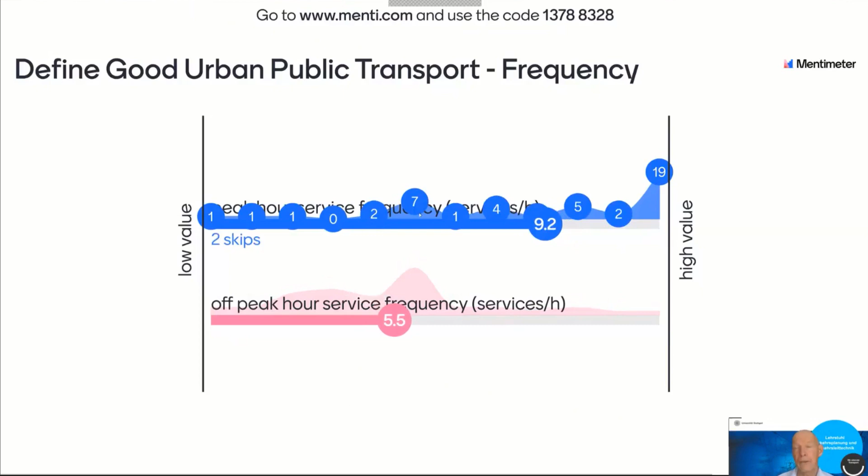We see that many of you think that every 5 minutes is what we should try to achieve. And then the second largest value is every 10 minutes - this is 6 times per hour. And for off-peak hours, the majority of you believe that we should also have 10 minutes in off-peak hours. Some go down to fewer services per hour. So this is frequency, and I guess we all believe that frequency is important.

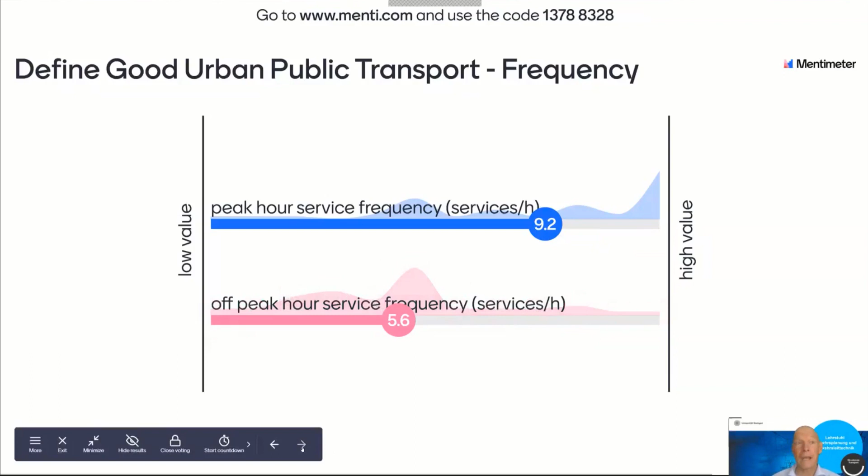Now, accessibility - how long do you want to walk to a bus stop and to a metro stop? And I'm talking about maximum distance. Of course, on average, it will be shorter, but if you allocate stops, where would you allocate them to say that is an acceptable distance in an urban area? So that means, something like 99% of your population should reach a bus stop or a metro station within that distance.

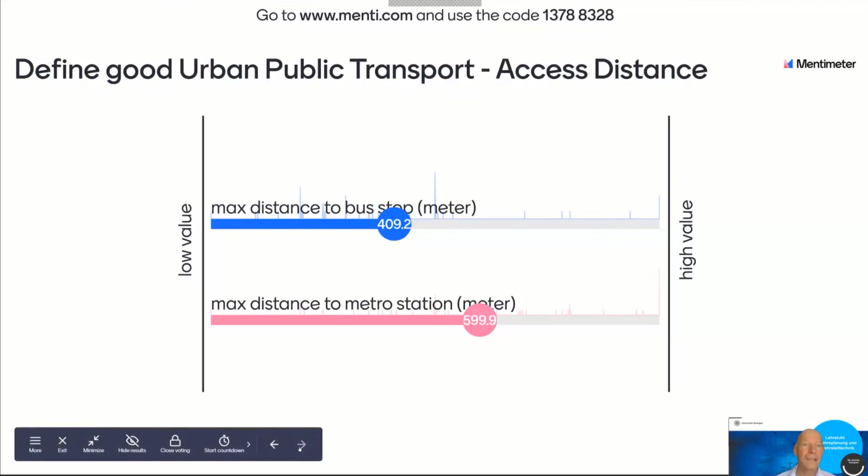Tomorrow we will look at some of those values again, what certain guidelines may say. And the last one, it's the most difficult one.

So what is your expectation for peak hour if you travel from suburbs to central business district? What is your expectation if it's off-peak hours, in the evening, at nighttime? And what is your expectation for tangential trips? So from maybe not suburbs to suburbs, but from somewhere in your city on the outskirts to some other place, so you're not going to the central business district.

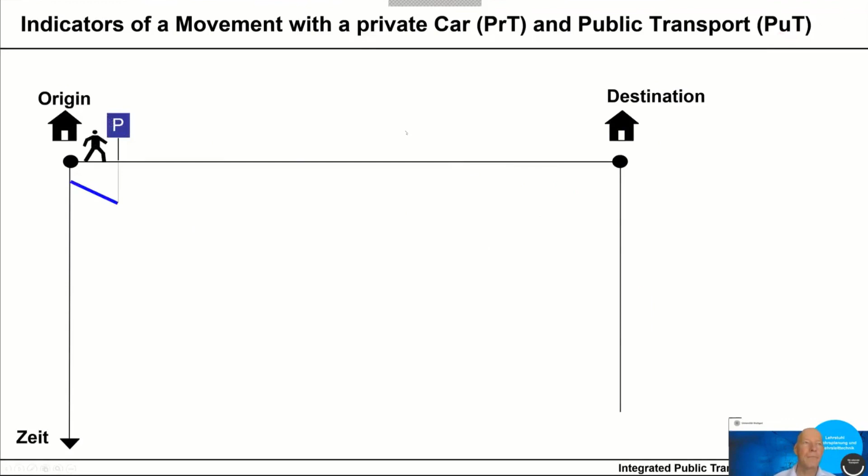If you travel by car, you park your car somewhere, maybe close to your house, so you walk to the parking lot. In the inner city, you have a feeder road, then maybe a main road. If you travel longer distance, after some time you will reach the motorway. You travel at higher speeds until you reach your destination, or at least your destination town. You decelerate, and maybe you search some time for parking, and you have an egress time to the destination. So the components of our time are access time, in-vehicle time, maybe certain delay times at intersections, parking search time, and egress time.

If you do it likewise for public transport, well, you also have access time. You walk to the stop, which is usually further away than a car. Then you wait a little bit, which we call origin wait time, depending on how risky or how risk averse you are, you add a little bit of buffer or less buffer time. Then you have in-vehicle time to the next stop, where you have a transfer wait time.

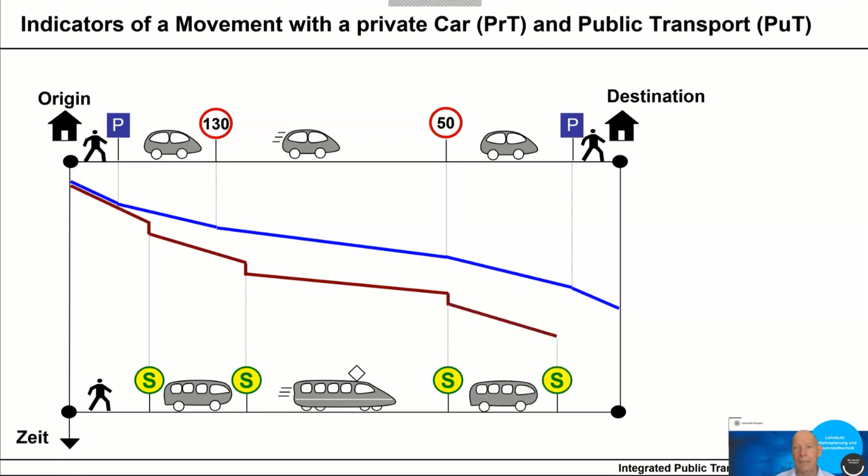And if you're traveling longer distances, but also on a commute, maybe you take the local commuter train or the high-speed train. On that part of your trip, you may catch up compared to the car. Then you slow down again, you go back to the bus, the last mile with the bus, and then you have egress time. In the end, in most cases, as you see here, it is very difficult to be faster than the car. If you want to be faster than the car, we need to have congestion, or we need a large section with high-speed rail, or urban rail can also be high speed if you have an underground, for example, compared to the speeds you can achieve in cities.

So the components or indicators of a movement are access time, origin wait time, in-vehicle time, transfer wait time, egress time, and if we sum it up, it's trip time. If we do public transport planning, to a certain extent it helps us if we can minimize all of those time components. You see that they depend on different things: the number of stops, access time, in-vehicle time, the way you organize your lines, transfer wait time, coordination of your timetable. And another indicator which is important in public transport is the number of transfers.

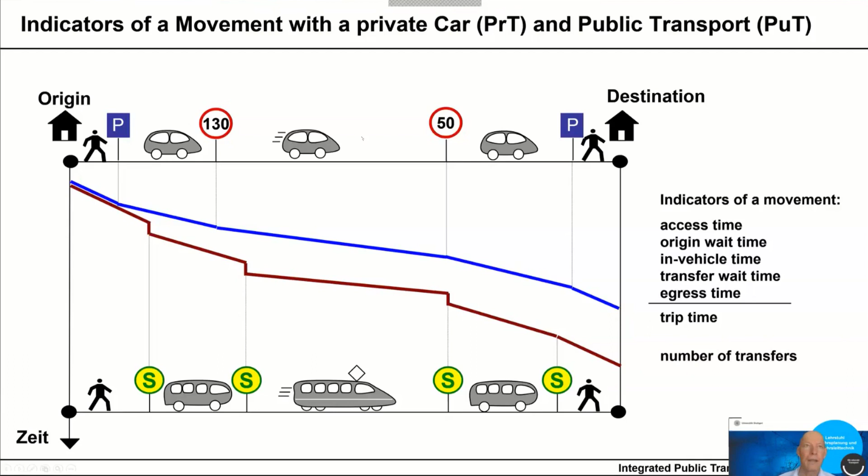Now, what is a good supply quality? It is common in transport planning to use the concept of level of service. You give grades, A to F, standing for excellent quality, good quality, up to insufficient or inadequate quality. Whenever we give grades, to a certain extent it's subjective, and it depends on the expectations you as teacher may have concerning your students. Likewise with transport, what is good transport supply depends on the expectations in a country. You may have more developed and less developed countries. What I show you in the following is taken from German guidelines, so German expectations.

When we do planning in Germany, we first start without grades. I guess you do it in many places, because public transport is a basic service. We want to provide mobility to people. It means people should get to shopping places, they need to get to hospitals, to schools, and for that we want to provide them with the possibility to travel.

So in Germany, we check whether people from their residential areas can travel to the nearest local town, or a town with regional importance, or a city with interregional importance, a bigger city, in certain times. The idea is that in this local town you find shopping, a school, a doctor, a pharmacy. If you travel a little longer, you reach high school, and even longer, university and hospitals.

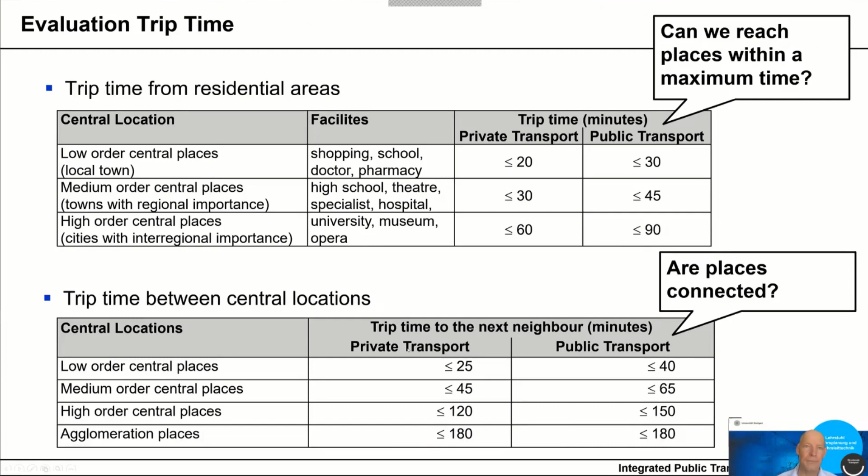Now, if you want to compare different origin destination pairs, different trips, it depends on the distance. If you travel short distance, you cannot speed up that much, you will not use a high-speed train. If you travel 500 kilometers, this is a different story. This is why for evaluating individual origin destination pairs, we developed a scheme where you look at the direct distance as the crow flies, and for that we evaluated with a direct speed: the direct distance divided by the door-to-door trip time of a specific mode.

Then you see that we expect certain accelerations. If your direct speed is around, well, above 80 for 500 kilometers, we say that is decent, an excellent service. Maybe you can do it faster, but this is what we want to achieve for grade A. If you need longer than this time, related to a speed of around 40 to 50 over 500 kilometers, then it's level of service F.

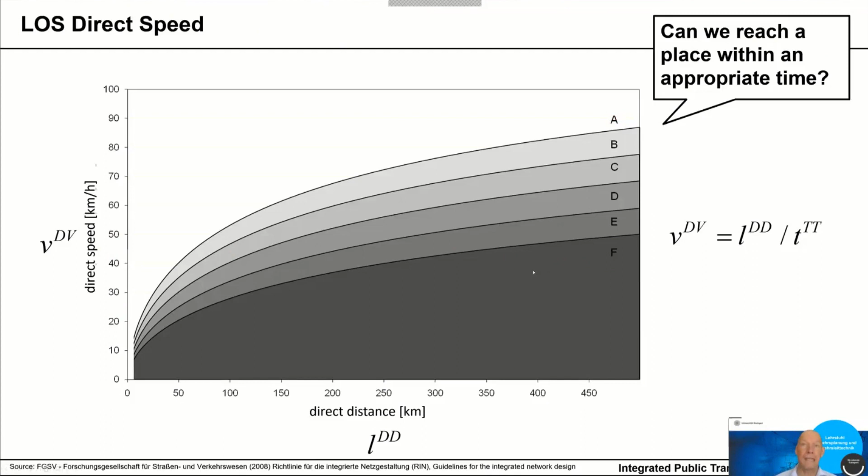Now, don't get confused because you think the speeds are too low. That is direct speed. The actual speed you need to drive is usually 30 to 40% higher because you have certain detours. And if you look at your car, the speed you need to travel faster than 100 to finally achieve grade A. So this is how we do it, but there are other indicators.

Because we want to make public transport competitive, we have the trip time ratio. This is what you just voted on, and we all agree that if the value is below 1, it's good, public transport is faster.

But if you're just looking at relatively short distances, 2 kilometers, 4 kilometers, you always need to walk to the stop, you have a certain waiting time, maybe you need to take a transfer. This is why we would still expect that a travel time ratio of 2 may occur, and you can't do anything about it. It's still good as long as you're not putting restrictions on the car. It is difficult to beat the car on short distances.

If you travel longer distances, this changes because you can catch up, and we are looking at the ratio. So this is the second indicator we are looking at.

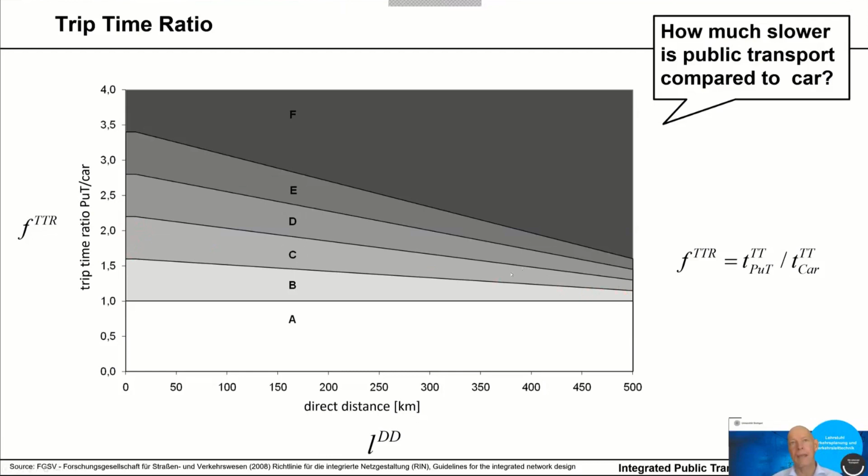A third indicator you may want to look at is the number of transfers. Of course, it's ideal if you do not have any transfers. So grade A is if you have below 1 transfer.

But imagine you travel long distance to a big city, to the capital city of your country. In my case, that would be Berlin from Stuttgart. That is by train something like 6 hours. I take the bus, I have to transfer to get to the station, so I have my first transfer. I transfer to the train, and maybe in Berlin I have another transfer. So if I have 3 transfers, that is pretty good.

I probably cannot do it with below 2 transfers if you travel long distances. And even if you have 4 transfers, it's still something we would probably accept to use public transport. So again, it depends on the scope of your planning, whether it's urban planning or long distance planning.

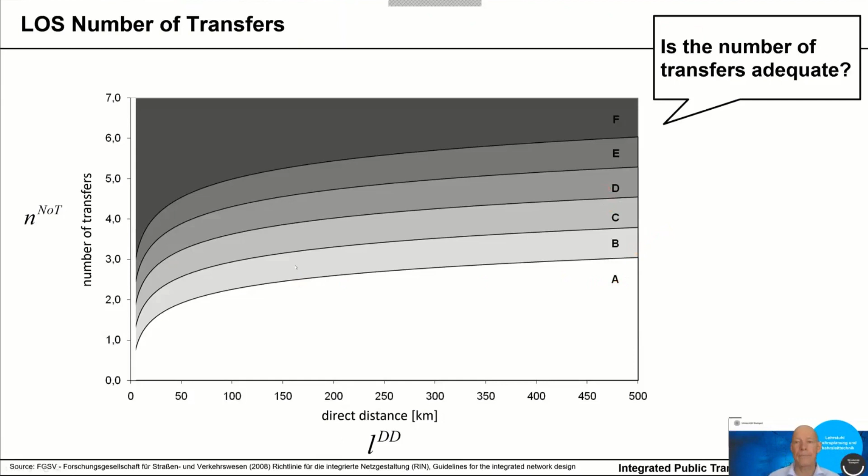Here you see how this could look like, an evaluation which was done some time ago in Germany for the future train system. They did public transport planning for the train system, and this was finally the solution they got. It's not yet implemented, everything you see here, but it's what they want to achieve. The colors stand for the level of service. Green is very good and red is poor. So in that case, you can evaluate a transport supply.

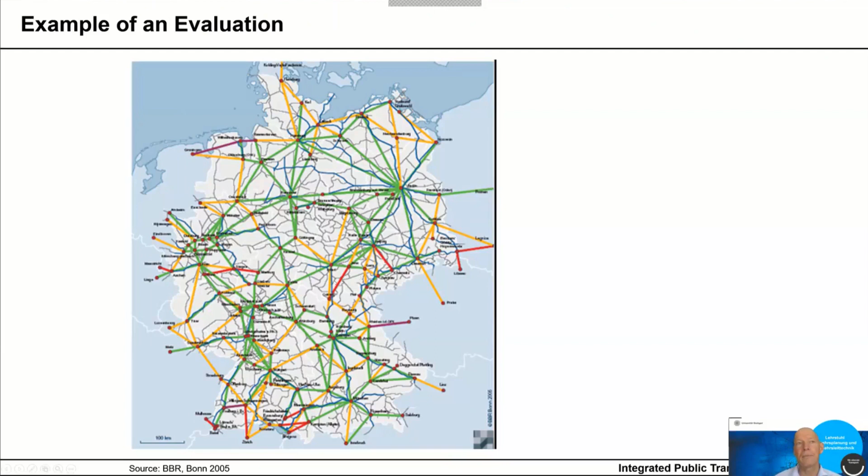Next point, optimal solutions. We want to optimize things. We want to minimize travel time, we want to minimize access time, maybe number of transfers. We also probably want to minimize cost.

Now, optimal solutions in transport, if you talk to politicians and to normal citizens, they always tell you we want an optimal solution. Let's do it right, your mathematicians provide us with optimal solutions. Now, the thing is that there are no optimal solutions. There are several optimal solutions.

If you look at public transport, for example, if you develop a network, it's easy to provide a very good solution if you have enough money. But usually we don't have enough money, so we need to save some money. So we cannot offer maybe a 10-minute headway, we need to go to the 20-minute headway. So in the end, we ideally find a solution which is on this red line and not somewhere up here, but along this red line the solutions are more or less equally good.

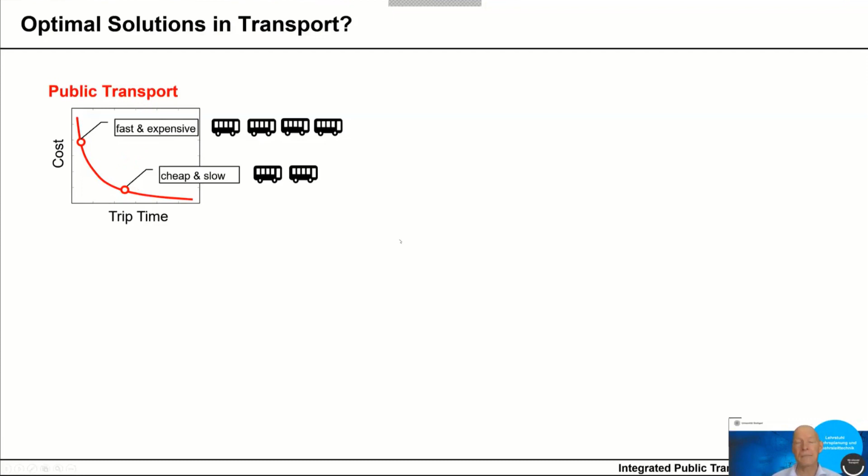And we need somebody to decide what is optimal in that sense. And you have that in all other parts of our life in transport.

Mode choice. If you talk to people, they like the car. Why do they like the car? Because it's faster and it's individual, you don't need to share it with somebody. But it needs more resources. So if you want to save the fuel, reduce emissions, it would be more optimal to have collective transport. This is resource saving. And whenever you do that, well, you need to walk to the stop, you need to share the vehicle with other people, you need to understand the timetable.

So again, what is optimal? What do we provide in our cities, in our countries?

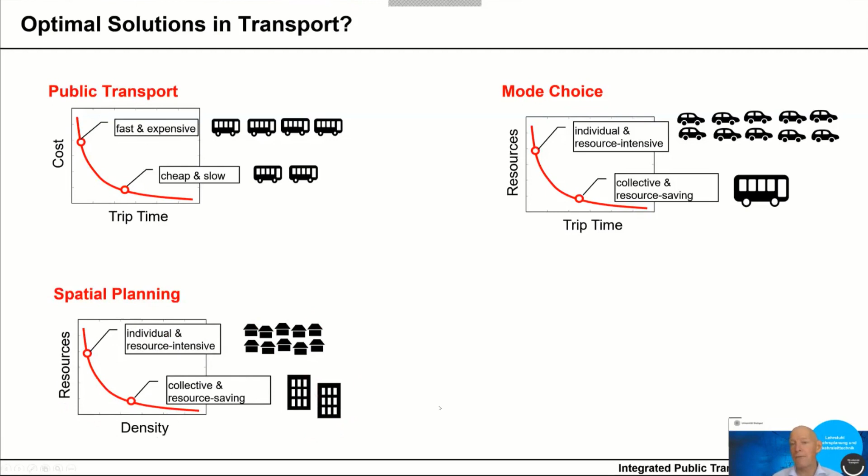Spatial planning, land use planning is a similar thing, and it's very much linked to public transport. If we just live in low density suburbs, it's really hard for public transport to collect people. At the same time, you need more space, more resources, more roads. So being individual, having your own nice house is maybe nice for you, low density, but it requires more resources. So for public transport, it would be better if we lived all in houses densely populated in urban areas.

And you can continue that. Traffic lights, bus priority. Who gets priority? The bus, the pedestrian, the car? Same question. If you want to make traffic lights more intelligent, and this is what people expect from us, it's difficult because a car driver would say an intelligent traffic light gives green to the cars, and a bus driver would expect the same for the bus.

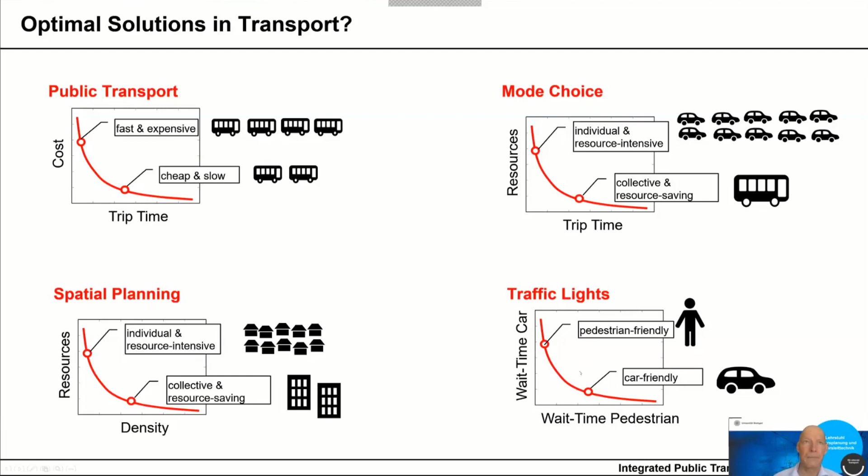So what we have is what we call Pareto optimal solutions. If you have solutions which are evaluated with 2 or more criteria, we have more than one optimal solution.

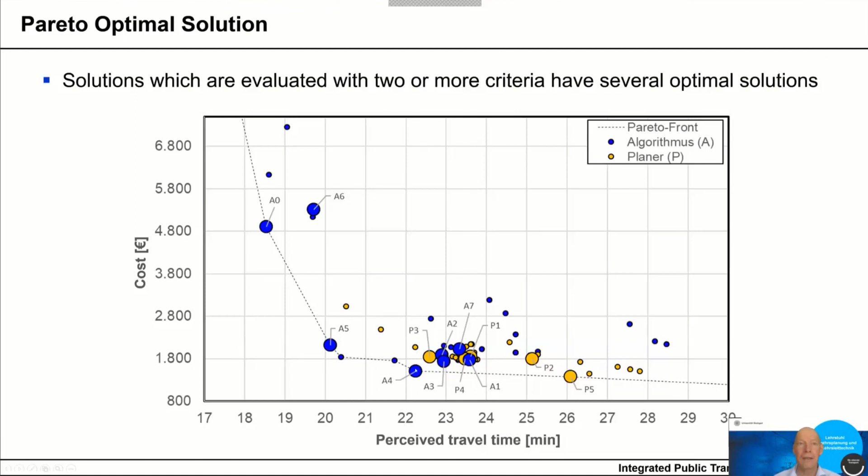And here you already see some results of our work. We try to find solutions for public transport networks, and this is what we will do together tomorrow. Here you see algorithmic solutions in blue, and you see solutions from planners. And this is the challenge we have. We try to understand how planners work, how algorithms work. And I just want to show you that we can have, of course, solutions which are very good.

Imagine you have a ride-sharing system, a taxi-like system. It will be very expensive, so the costs per day in that case will be 4,800 euros. But you are fast, so it would be very convenient, very close to the car.

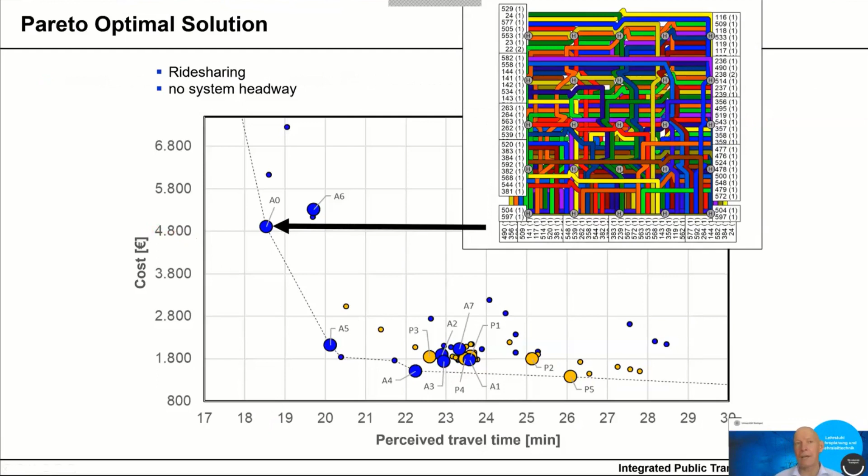What we usually have is something like that. We bundle demand onto lines. People need to make transfers, so this is why travel time goes up, because you're not traveling directly. But we need fewer vehicles, so that saves us money. Now you can choose what is the optimal solution for your city.

This was done by a planner. Now, if you give it to the mathematicians, the people in computer science, they can optimize it. Optimizing timetable is not fun for a human being. If you give it to a computer program, it may identify that there's not enough demand on the blue line, so you can reduce some of it. At the same time, you shift the timetable a little bit, and it turns out that you can't really see it here, but it's probably a little bit cheaper and even a little bit faster.

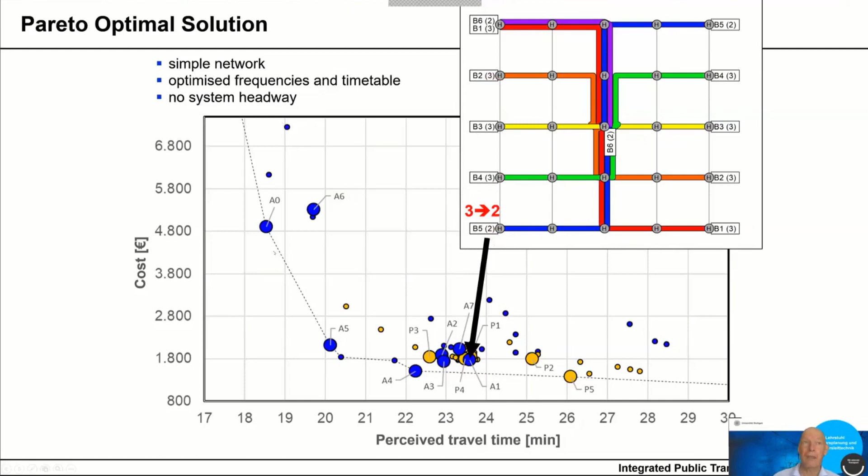But it doesn't have the same headway. So that would be a 20-minute headway, and suddenly you have a 30-minute headway. So it's less equal, or less regular.

We worked on cheap solutions. This is the cheap solution. Looks interesting, but it also assumes a certain amount of cooperation. So not every passenger is allowed to take the shortest path. You have to coordinate yourself. So probably an unrealistic solution, but in the end, it would work if passengers would cooperate.

And here you have a solution where we minimize the transfers, so it's a solution where you get very direct connections. Direct, again, is fast. But if you show that network to a transport planner and maybe a passenger, they would say, oh, that looks rather complicated. So understanding the network is maybe difficult. And here we don't have a headway, we just have, well, one service per hour, but more direct.

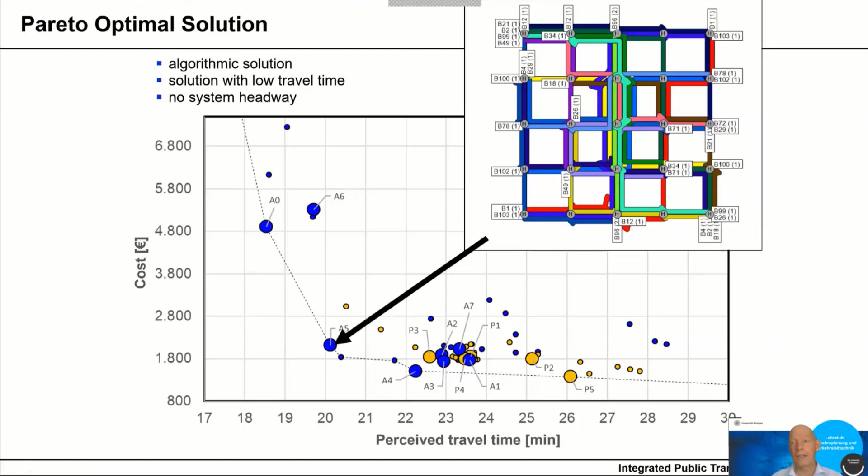How comes we only have one service per hour? Because it's not a constraint in our algorithm. We can add that to our algorithm, and it's not considered in the perceived journey time. You could add something like waiting time at the origin, and then again, you would get different results. So the first understanding is that whenever we optimize, it's not the one and only solution. We have a set of solutions.

And here you find one which everybody would say, oh, that's not optimal. That is more expensive and slower. It's a very simple solution. We just have one line for each corridor of our network, so we have many transfers. But the good thing about this solution, it's very robust. If you have flooding, if you have an accident, you will always find a way around it.

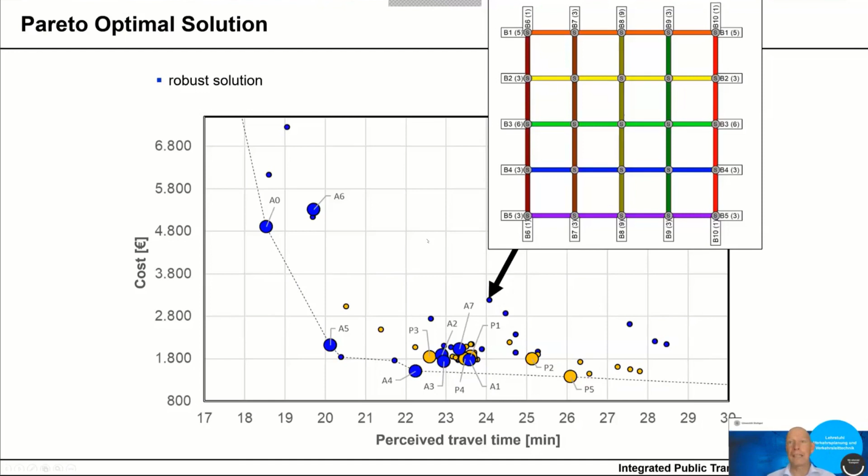So this is something we did not yet capture in our two indicators, cost and perceived travel time. So always bear in mind that there's probably more than what we may think of, additional indicators, reliability, and we'll look at that on Friday.

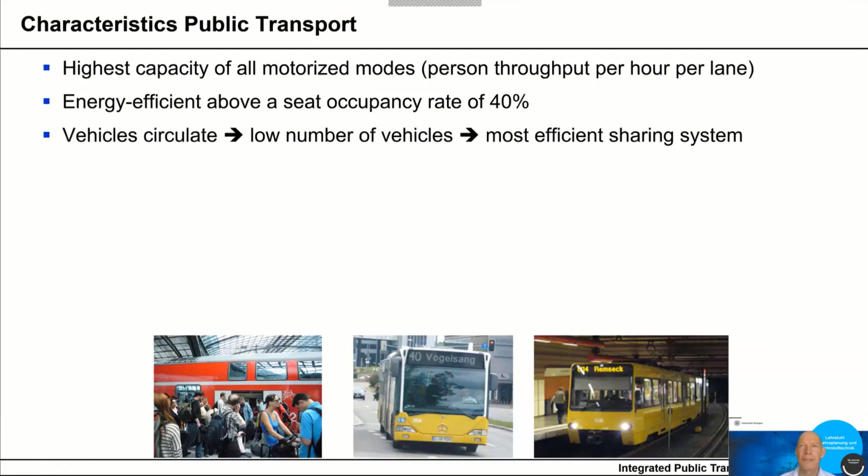So the vehicles circulate up and down a line. That means we have a low number of vehicles. What people try to do nowadays with ride sharing or ride pooling, we already have. Public transport is the most efficient sharing system. We share vehicles, and it provides mobility for people without a car, which is important.

And well, all this is plus points for public transport. But then there are limitations. The limitations come from needing to go to a stop, needing to choose a certain line, needing to obey a timetable. And that reduces individuality.

So this is why people often prefer the car. The limitations at the same time increase the efficiencies, and this is something we need to understand. So don't expect public transport to be as good as the car - it will never be as individual.

You may have benefits if you have high-speed trains. You may have benefits if there's congestion on the road. But in the end, public transport is something which we give to our city as passengers, because we are willing to walk to the nearest stop, which is very efficient because the bus doesn't have to take detours. We walk 300 meters and there we meet.

We have lines. Our network is much smaller than the road network. And we agree to travel at certain times - at minute 10, at minute 20, at minute 30 - not at any time we want. And we understand that with a 10-minute headway this is maybe not a problem, but if you have a 30-minute headway at night, maybe you rather take the car.

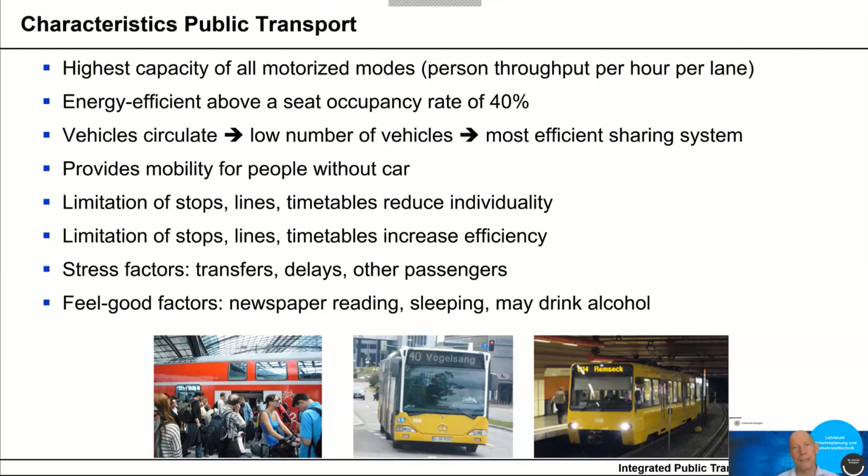Some of that may disappear in the coming years with automated vehicles. So we need to be aware of that.

You may know images like this - you find it on YouTube, the making of. It's taken in Switzerland, where else? So you see that public transport is much more space efficient than the car.

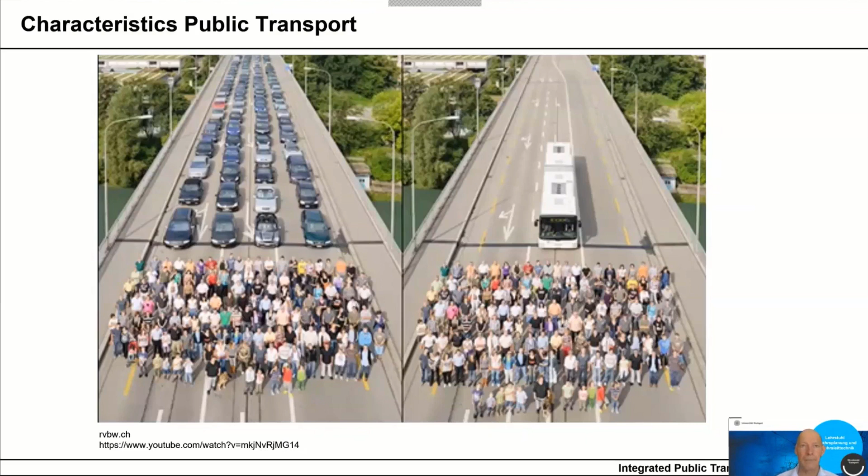Now, we are transport planners. As transport planners, people expect us to provide good quality, and they expect us to shift demand from car to public transport. And if I speak to students, but also if I speak to politicians and many citizens - how shall we do it? We improve public transport supply. This is the expectation, and like you said, maybe make it cheaper, make the fare system easier. This is the expectation, and the expectation is that this will help to solve the problem.

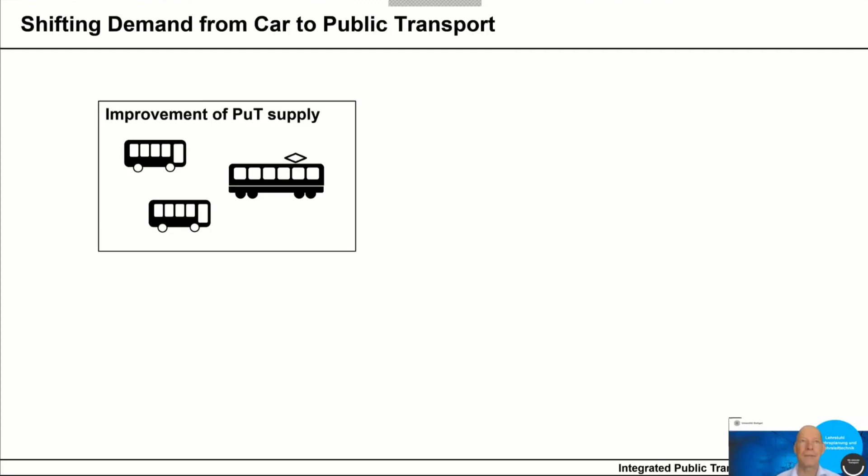Well, I tell you, if you make public transport better, more people will use public transport, but they may not necessarily come from the car. If you want to shift people from car to public transport, you need to work with restrictions.

And you can justify in many cases those restrictions, especially in urban areas. We could install speed limits. We could introduce tolling - maybe not a toll road, rather something like congestion charging, so tolling for an entire region. We can work with prices for parking.

So if you don't do that, there will never be an argument for using public transport as long as you can afford a car. And if you go to places like in Germany and make public transport free, yes, people would probably use public transport more frequently. But there are not that many car drivers who say, oh, finally public transport is free, now I can afford public transport - until now, I could only afford the car.

So if you want to change something, always think of the car as well. In the next 5 days, we look at public transport. But don't forget, it's not public transport only.

Some people say that we need to shape consciousness, we need to install mobility culture. So maybe they talk about the next generation, which is you, and the next generation doesn't love a car, they love public transport, they love their smartphone, they will be different. I'm not so sure about that.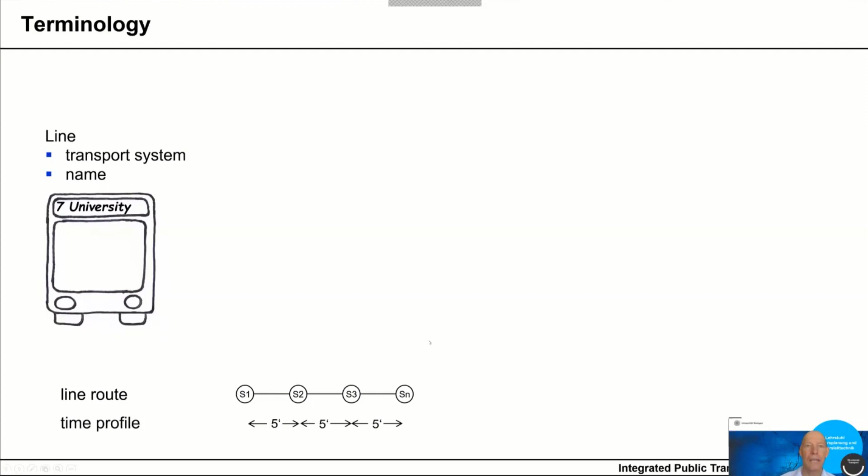This line has one or more line routes, so they serve a sequence of stops. On that sequence of stops we have something we can call a time profile - this is the time you need between the stops, we call it a time profile. And that is the basis for our timetable.

A timetable is a schedule of services. Now if you look at one, here you have a graphical timetable, so we have the spatial axis and the temporal axis. And if you look at one of those lines, we call it a service run. A service run starts at a terminal, serves several line stops, and ends at a terminal.

We not only have service runs, we also have empty runs. For example, we have pull-in, pull-out services from the depot to the first stop. We have sometimes interlining runs connecting two lines. So this is timetable.

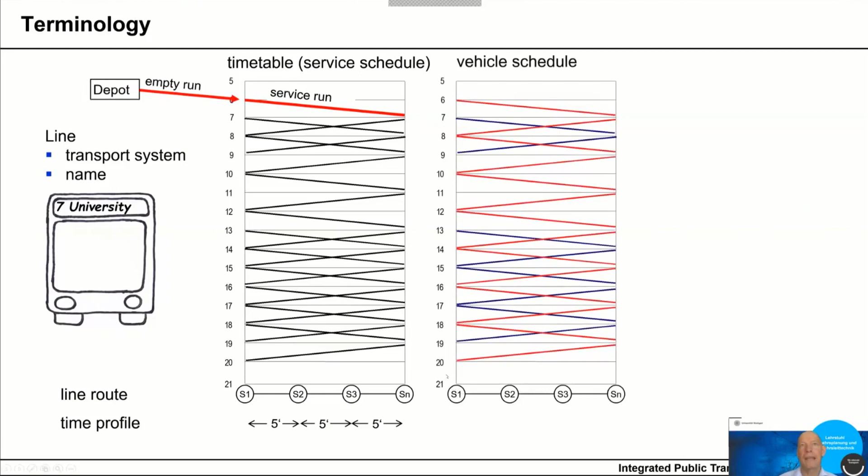Then we have a vehicle schedule - we will talk about that in more detail. It describes the sequence of service runs which are served by one vehicle. So one vehicle, for example the red vehicle, serves a set of service runs.

And likewise we have a duty schedule. Duty schedule is linked to the labor - Anita called it crew schedule, maybe one or more person. And you see that our buses, they operate all day through, but human beings, they need breaks. So this is why we work in shifts, and this is what we describe in a duty or crew schedule.

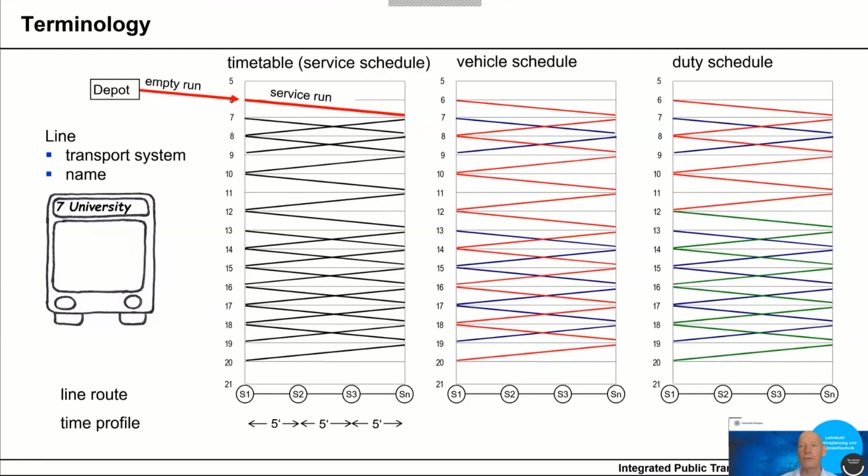If we are more specific, so we have the service run - this is a specific service departing at a certain time, maybe limited to certain days. This service is only operating Monday to Friday or also on weekends. We have empty runs: pull in, pull out, interlining between two stops.

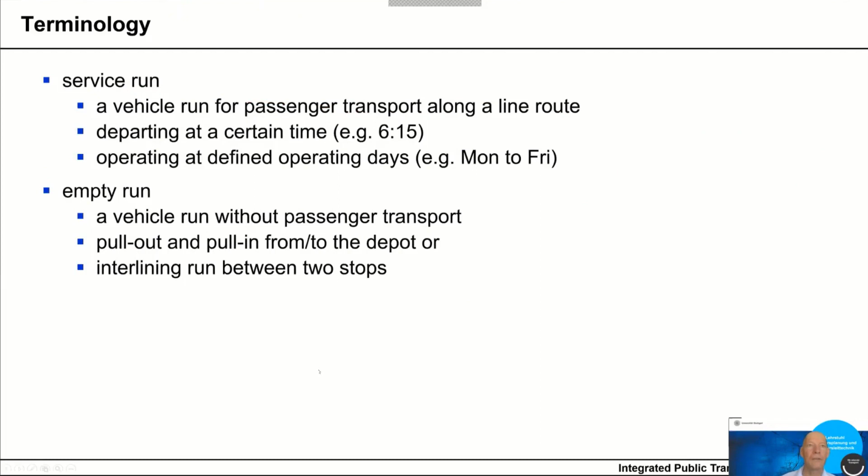We call the time in the vehicle runtime, and we have two types of runtime - some people call it also running time. We have the runtime between stops, so from the departure at stop N until the arrival at stop N plus 1, we call that runtime. But also the entire service run from terminal to terminal is also what we call runtime - this is the runtime of a service.

We have the dwell time. This is the time from stopping of the vehicle, opening the door, then we have passengers boarding and alighting - actually better first alighting and then boarding - and then doors close again. And this is what we call dwell time.

And we have layover time. Some people call that recovery time. You arrive at the terminal and you need some time until you start your return journey - that is the layover time.

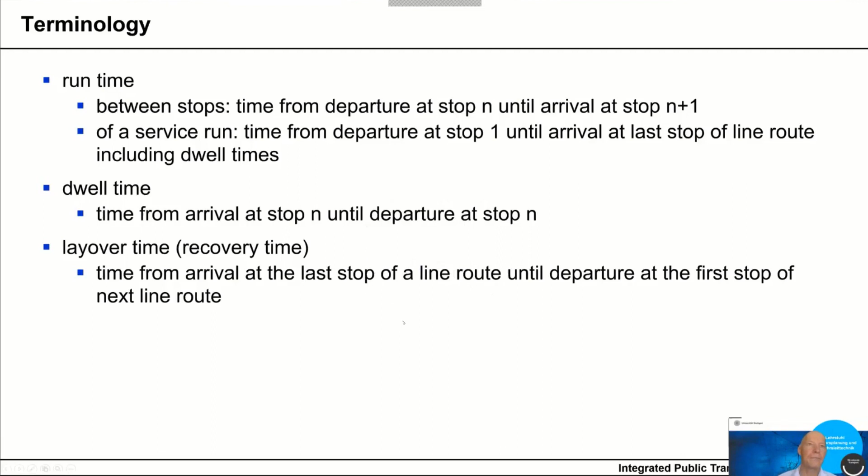If you look at an entire schedule, we can sum up over all services, and that is what we call service time. Some people call it revenue time - this is the time for passenger transport where we can earn revenues. So you can sum it up over all lines, and this is a value for your network.

We also have empty time - this is standing time and pull in, pull out time. And if you sum it up, this is what we call operating time, service time plus empty time. It's probably close to the time we have to pay for labor because, well, if there's empty trips, you also need a driver and you have to pay the driver.

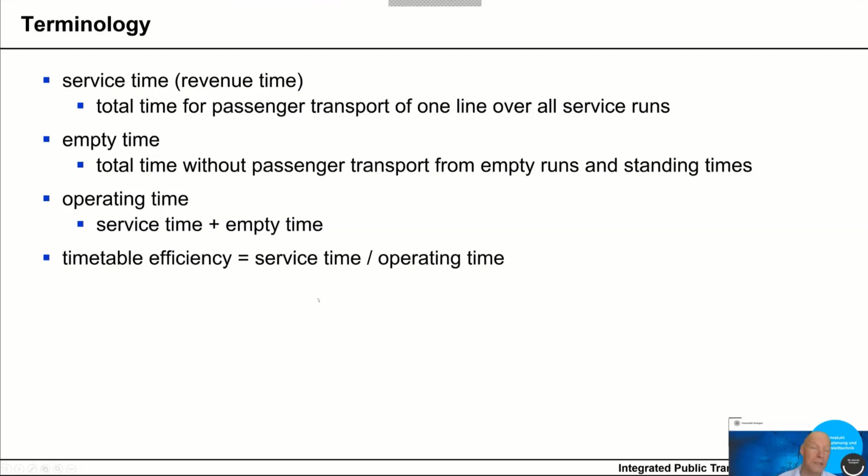And we can compute something which we call timetable efficiency. This is service time divided by operating time. And ideally this value is close to 1, which it is not, but that is an indicator of how efficient we use our time.

So from the perspective of the vehicle, we have a vehicle block or a vehicle schedule. You see a vehicle pulling out from the depot, providing a service, so the service time, maybe interlining, unproductive time to a stop, standing, and so on. This is on the connection between timetable and vehicle schedules. We talk about pull out, pull in, standing, and interlining.

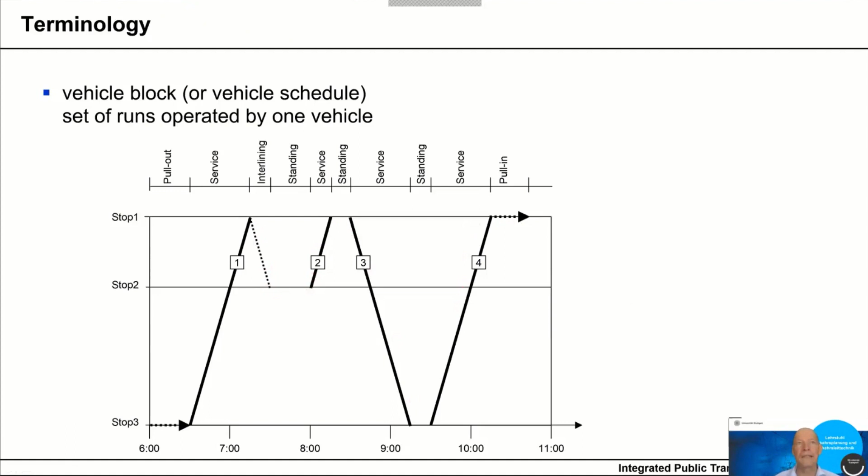Finally, the planning task. What do we do in public transport planning? Well, we develop a public transport supply. Now what does that mean? We need to determine the location of stops.

And we have terminal stops. Terminal stops require certain characteristics. You need to be in a position to turn your vehicle around. You cannot do that everywhere. Then we have intermediate stops, line stops.

And the next thing we need to do, we need to estimate the run times between adjacent stops, because we need that for our timetable. What is the runtime of a line or the runtime of a service run? The runtimes may vary between the time of day.

So then we build line routes. Line routes describe the spatial course of a line. If we have several line routes, we get a line plan. We now know our transfer stops, and we can compute the network length.

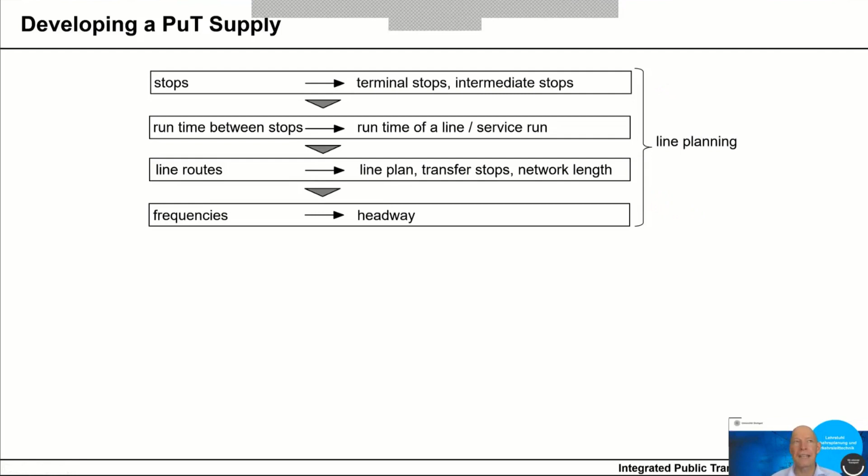And we need to determine frequencies. Frequencies provide us with a headway. How often do we expect a certain line to operate? And all those four steps are often combined in one, or labeled as line planning. So you could have more specific words like stop planning and frequency setting, but in general, this process is the line planning process. On top of that, in the next step, we do the actual service scheduling.

You may call that timetabling. It's a little bit different whether you have frequencies or whether you have precise departure times. With the precise departure times, you get the timetable, and you also define transfers, the connections. What is the transfer wait time if you transfer at a certain stop? So the task of service scheduling is also to minimize the number of transfer wait times, coordinate the timetables.

Then we have vehicle schedules. So we just looked at what a vehicle schedule means or what it is. Once you have done your vehicle scheduling process, you know the number of vehicles you need to buy. And you know not just the service kilometers, this is what you already know from the timetable. You know the pull-in, pull-out trips, you know interlining trips. And from that you can estimate or compute operating kilometers.

Then we have scheduling, duty scheduling. Once you do that, you know the number of duties you have, the number of shifts, and the operating hours. This is later on related to labor cost. And duties are not yet directly linked to persons.

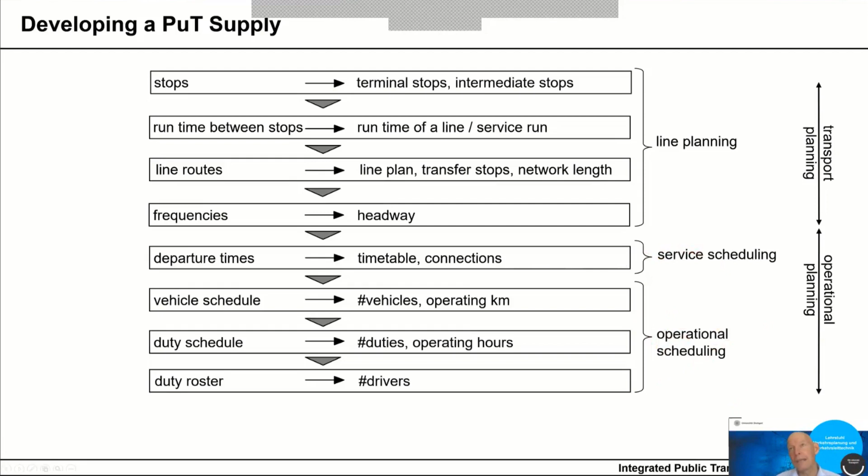Depending on which country and under which legal conditions you work, this may already be done by the operator. The scheduling is something in between, who is actually doing the scheduling, but often it's the transport operator. They do the timetabling, and they decide about the vehicles, which vehicle serves which vehicle schedule, how do we design our schedules. This is operational scheduling. And since those two institutions, planning and operational, are often different institutions, we have a gap.

So we have commonly feedback here between stops and run times. Actually, one is missing here, and frequencies. But they focus very much on transport supply, very much on quality. And then we go down to the operator. The operator is thinking more in costs. How many vehicles do I need to purchase? How many drivers do I need to employ? How many kilometers do I have to produce?

They adapt or adjust the timetable in such a way that it allows efficient vehicle schedules and duty schedules. But what we do not have, or what we should have more, is the feedback between operational planning and transport planning. Because if you design your network in a different way, you may save on operational issues. And if you're not just focusing on operational issues, then you can make your public transport supply better, so it better meets the needs of our customers.

So this is sort of the framework of our research group. We want to get those parts together in a more efficient way. You can do it sequentially in optimization, but here it's more like the operational aspect, how we do it in practice, operators and consultancies.

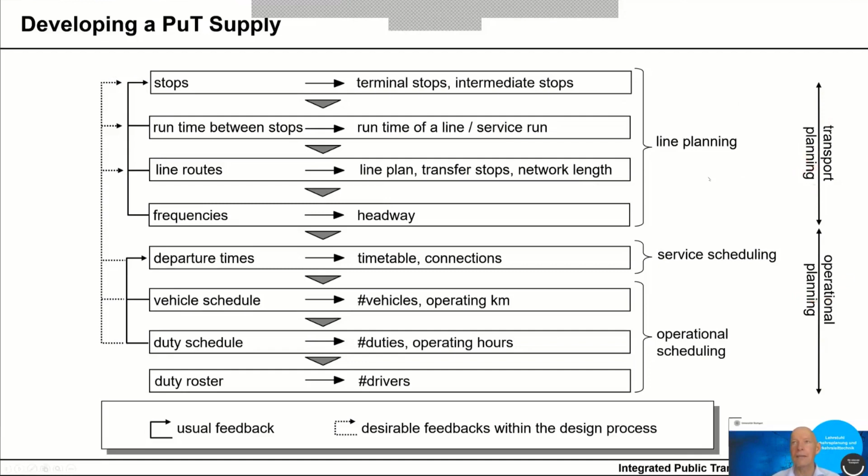Now, if we look at this process and the entire design process, imagine you have to do it for a city. How does the planning task look like? And I called it now an integrated design process.

Usually, politicians in some way or society gives you the objectives. So they tell you about expectations in terms of number of transfers and travel times. They may have something like rules on minimum level. You need to offer a service once an hour, a minimum level. This may come from politicians. Or you need to reach the central business district from every residential area in less than 60 minutes.

So this is objectives. But another objective could be something like, we want to be, compared to the car during peak hour, not slower than 50% slower than the car. In the end, we want to have a future transport supply.

Now, what do we develop? A solution. This is what we will do in the next days. A line plan, a timetable, vehicle and duty schedules. We put that so that we can work with models in a network model. We will discuss about that after the lunch break.

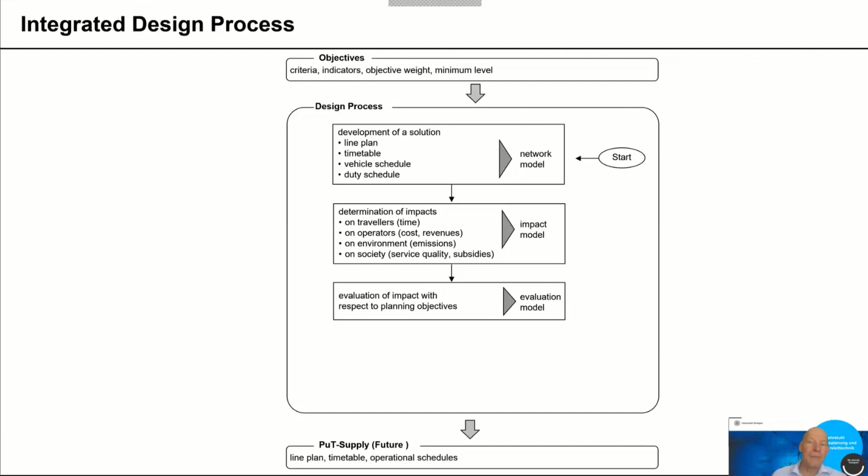If you are a mathematician or a person in optimization, you would probably call that an objective function. So you put everything in one function and you have constraints. In public transport planning and practical transport planning, we also have certain ways to evaluate the quality of a solution, but it may be less formal than you do it with an objective function.

Now you look at the result and you check, do I meet my objectives? Do I have deficiencies? If no, then you're happy that you achieved your goal. The process ends. But very often the answer is it's not yet good. And then you have a feedback loop. You go back to the development of a solution, and now you can change your line plan and your timetable and the schedules. And this is important for our summer school.

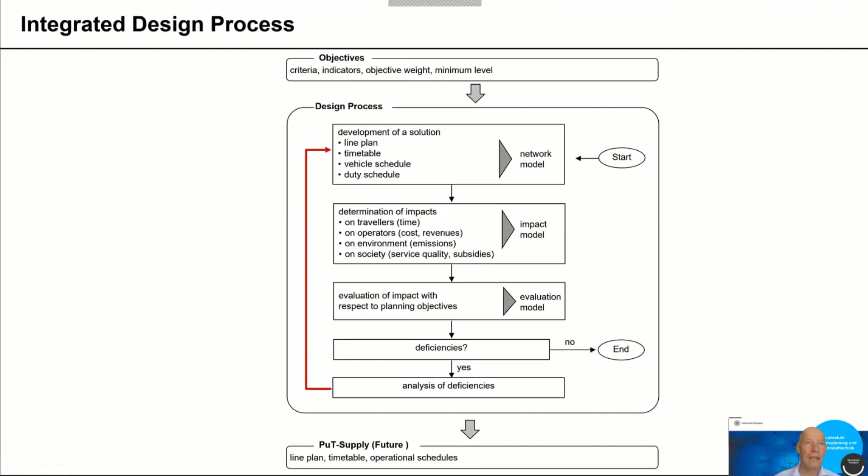Because we talk about this feedback loop. We can do that in several ways. We can do it manually. We can do it computer-aided. Computer-aided means that some parts you do manually using a computer. For example, you develop a line plan not by an algorithm, but by a human being entering line routes into a computer screen, into a network model. But what you do, the creativity is with the human being and not with the computer.

The computer then computes the impacts, for example, the travel time. And then we have mathematical optimization. And my personal evaluation at the moment is that duty schedules and vehicle schedules are ideal for mathematical optimizations, and they are state of the art. This is what we do for decades.

Timetables: many of the timetables are still produced by human beings, but if you really look at it and observe the process, then you would also say a computer can do that better. There are certain exceptions. If you look at Switzerland, they have certain methods of doing it. So you probably combine both things, computer and human constraints.

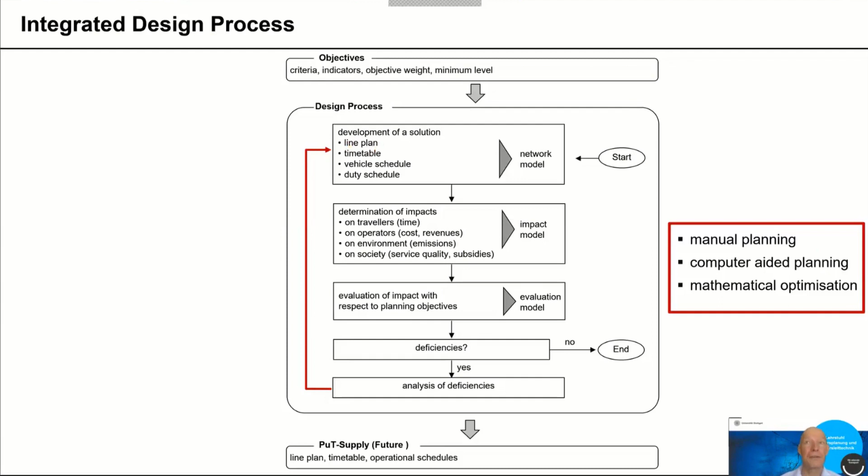With line plans, this is what we are working on at the moment. And probably here, it's still difficult that computers can come up with a solution which planners like. So this is one of our objectives, to develop line plans by algorithms which produce solutions which are - I'm not sure if I should say similar to man-made solutions, but which are competitive. And here, the solution space is so large that until now, we are still working on it. And there's room also for you, if you want to go into that field, to do more research. Of course, there is research in all levels we see here.

Whenever you do planning and you're a mathematician, you try to get your things straight. You simplify the reality. You try to build a model which you then can optimize, and you leave everything out which is unnecessary. Now, if you do planning, we often have certain constraints, boundary conditions, a framework.

So when you start planning, check what you need to do. What modes are you talking about? Are you talking about railway? Are you talking about road and buses? Maybe you're looking at on-demand services.

You need to look at the vehicles you have. Maybe you want to purchase them, but those vehicles have certain characteristics in terms of speed and capacity. And if you do it with a certain city, you cannot get rid of the existing operator, even if you think they may be inefficient. You need to cooperate with the operators, and they have certain depots which are already there. So you need to clarify that as input.

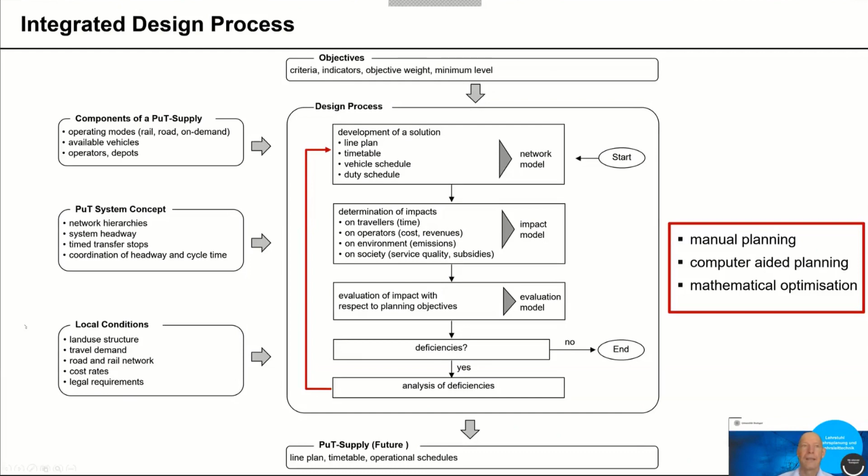So, the planning task, if you sum it up, is, if you do it in steps: first question, what is an appropriate system? Is it road-based or is it rail-based? If you have a metropolitan area which has no rail yet, you need to discuss whether you should build a metro-type system.

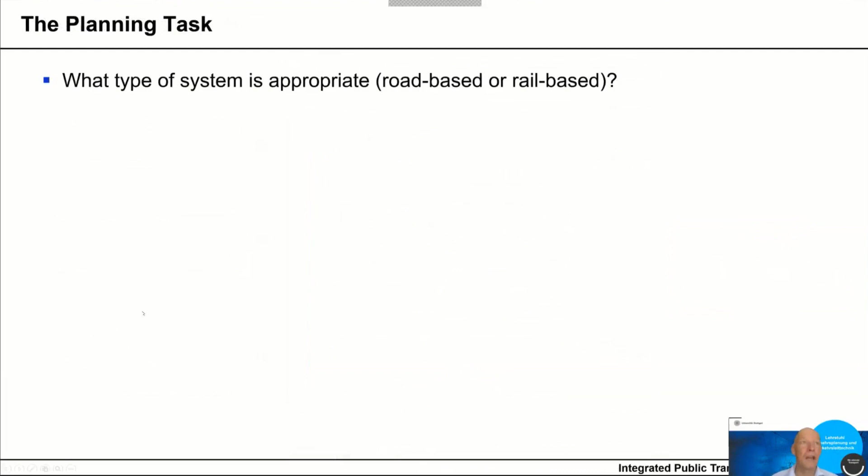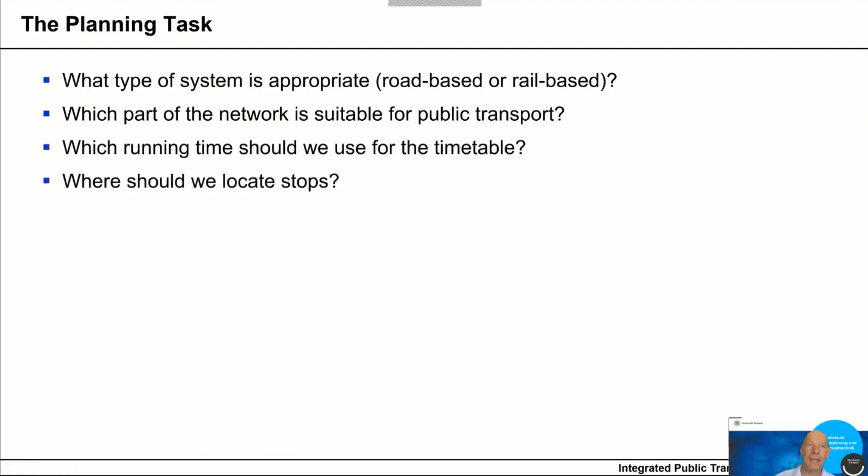Then the next step, which part of the network is suitable for public transport? Because you cannot use all feeder roads, for example, for a bus. Then which running time should be used for the timetable? Where should we locate stops? How many lines do we need? What service frequency is required? And what type of vehicle is adequate? A short train, a long train, a standard bus, an articulated bus.

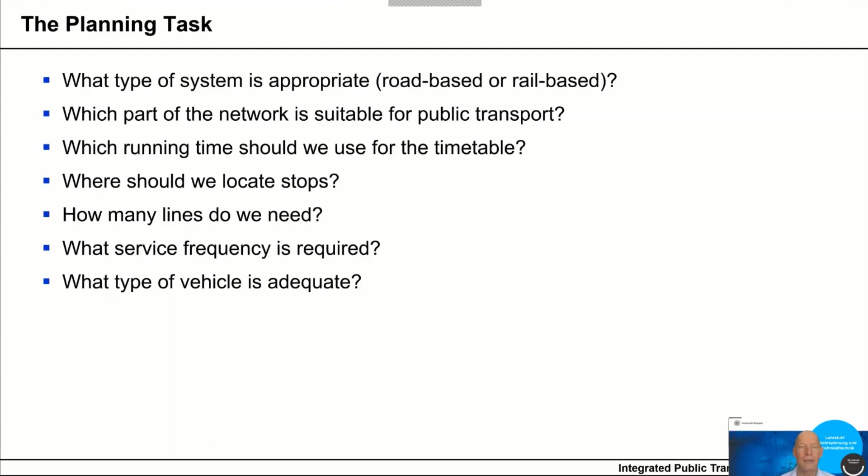Now, tomorrow, when we go to actual planning and we plan together, I want to answer those questions. I will look at all of those questions to give you an idea how we do that, either manually as a planner, computer aided, or later on in the coming days using algorithms.

This is the idea. And in the end, the overall question is, how do you or do we design a public transport service that is not optimal? Because now we know optimal is, well, difficult, because we need to define what we mean by that, which is as good as possible, looking at service quality and at cost.

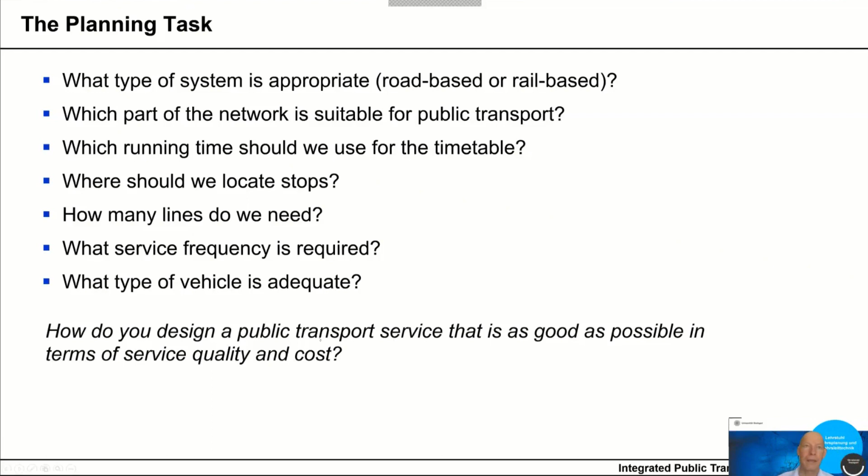And with that, I'm happy, because I didn't know how long it would take me, and I was afraid that I may take longer, but now I'm very much in time.

So I can close with this quote: a developed country is not a place where the poor have cars, it's where the rich use public transportation. This was said by the mayor, or former mayor, of Bogota in Colombia.